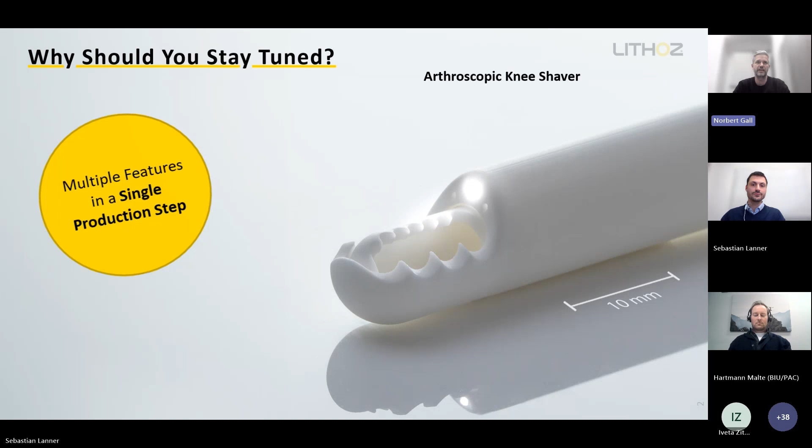So first of all, as a teaser, I wanted to highlight again why you should stay tuned during the next 60 minutes. It's exactly because of parts like the one you see here on the right-hand side. This one is an arthroscopic knee shaver. You maybe perfectly recognize it, but this knee shaver has been printed in one single production step, and still it has, of course, multiple features, as you can see here.

First of all, we can find two channels for rinsing in this part, another bigger channel for putting a light source through, and a channel for the drainage. And above all, of course, it's a knee shaver, so it also features rotating cutting blades, as you can see in the middle part. And I wanted to mention that again.

Why is that so important, and why is this so innovative, what we are discussing here today? Because it's about ceramics, and ceramics are the world's toughest materials in existence. Ceramics, as you might know, are PFAS-free, and they are perfectly biocompatible. We can print these kinds of technical ceramics for the medical industry in ultra-precise geometries, and as you will see later on, Bosch Advanced Ceramics is doing so in serial production of bigger or smaller lots.

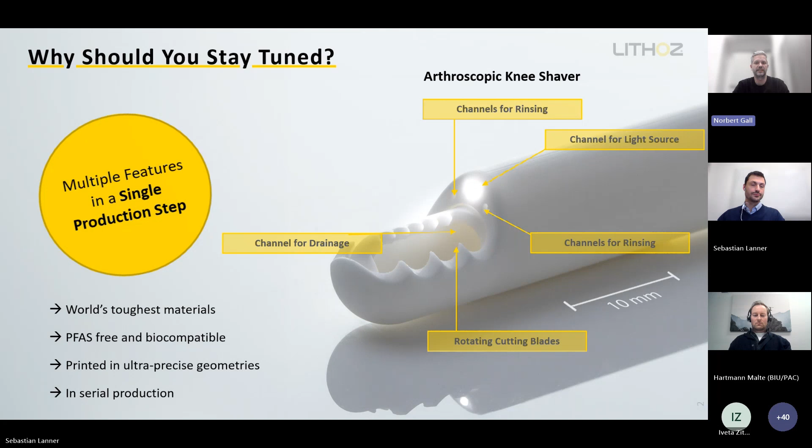So this is really something that is and will be highly relevant for the entire MedTech industry. Before we go into detail with our experts, I just wanted to guide you shortly through this webinar's roadmap. In the first part, Sebastian will take over. Lithoz will then explain the challenges of the MedTech industry as they are today. You're probably perfectly aware of those challenges, but we will also point out where we see the potential to innovate.

We will get a quick introduction into LCM ceramic 3D printing by Lithoz. After that, Sebastian will go into detail about which ceramic materials are actually printable with LCM technology, and he will give you a first short glance into multi-feature MedTech parts. Then he will hand over to Malte, and Bosch Advanced Ceramics will go more into detail about why customers opt for ceramics.

So they perfectly, of course, know why someone chooses ceramics over metals or polymers. And a very important part will also be their MedTech applications, which they have already been producing in serial production at Bosch Advanced Ceramics. And before I forget, of course, you might have heard there are some corporate news as well, and Malte will, of course, go also into detail here.

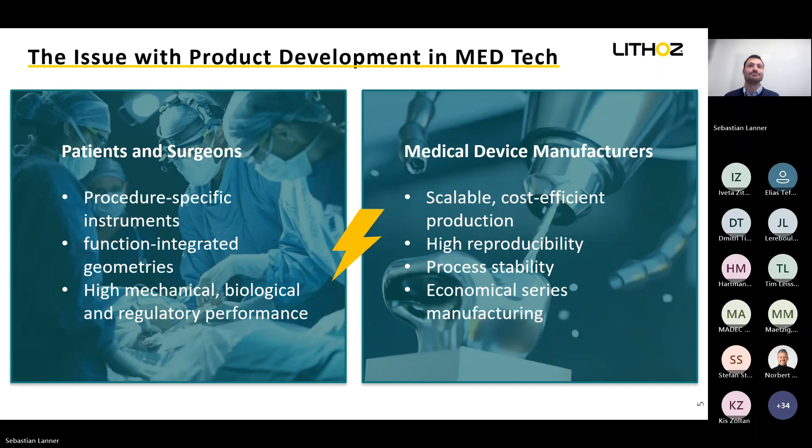We strongly believe these views can be reconciled with less effort than is currently required, generating a win-win-win situation for all three parties: patients, surgeons, and medical device manufacturers. So what gives us the motivation to believe this?

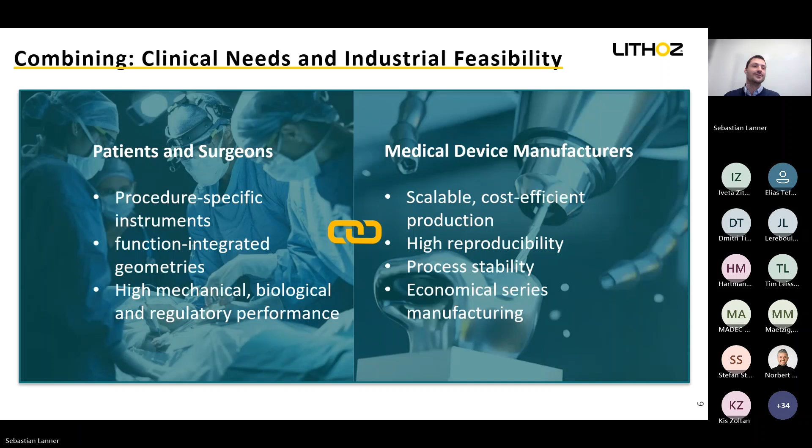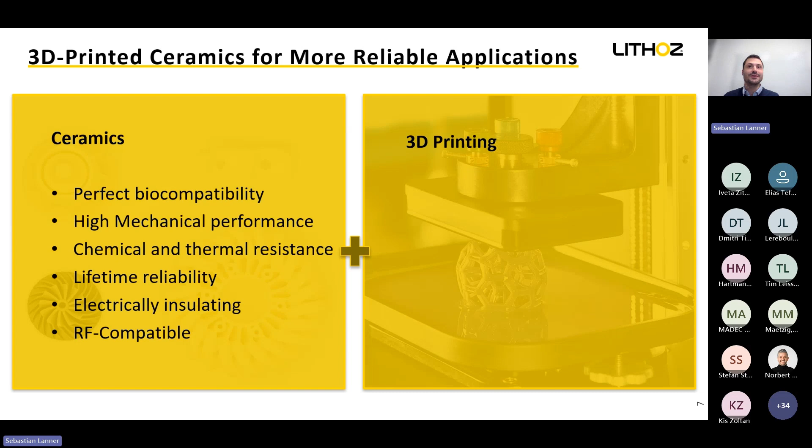Lithoz has developed a technology that allows us to combine, on one hand, ceramics. We talk about high performance ceramics, used in MedTech already for decades due to its outstanding properties, like excellent biocompatibility enabling long-term implantation without adverse tissue reactions, and high mechanical performance with outstanding hardness and wear resistance, which is critical for load-bearing implants, for example.

We have chemical and thermal resistance, allowing sterilization and stable performance in aggressive biological environments. Because ceramics are electrically insulating and RF compatible, they are ideal for implantable electronic devices, such as neurostimulation devices or hermetic housings. On the other hand, we combine this exceptional material with the most innovative manufacturing technology: 3D printing.

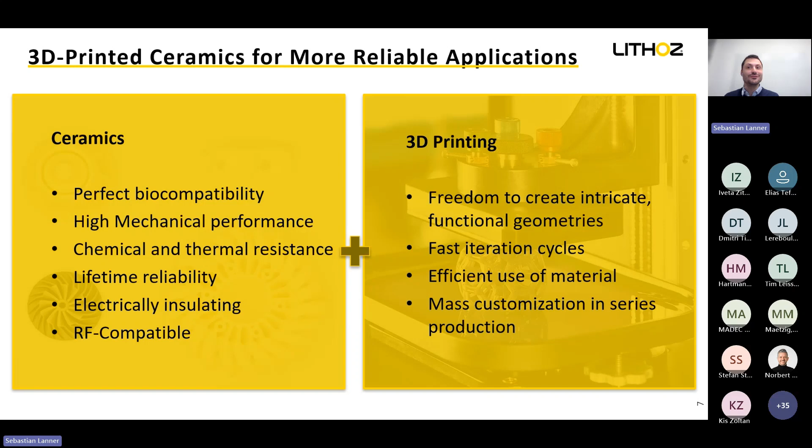This allows us to create new geometries. We have very fast iteration cycles, because new ideas need a lot of iteration to become a product, and this is very easy with 3D printing. We have the possibility to very efficiently use our material, which brings a new topic of mass customization in serial production. So why do we see an advantage here over already proven technologies?

Let me put this here. With traditional technologies, when we create business cases together with new leads, new projects, and new parts, we see that a lot of cost goes into molds and tools for drilling and manufacturing. We have long development cycles, as it takes quite some time to iterate with these technologies, and as soon as you increase complexity, it drives the costs immensely.

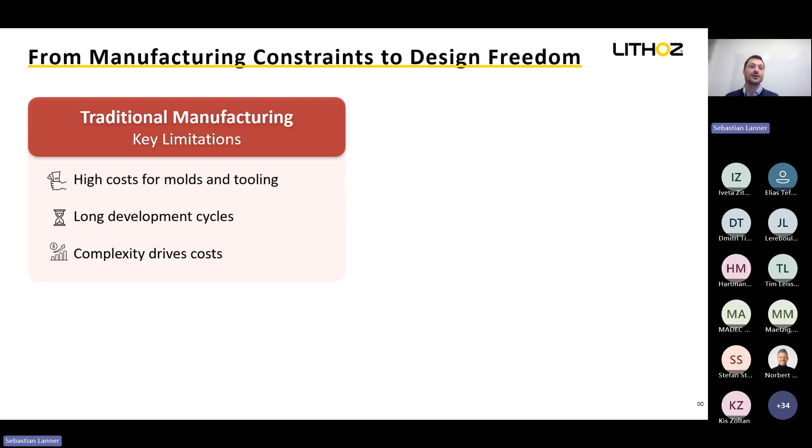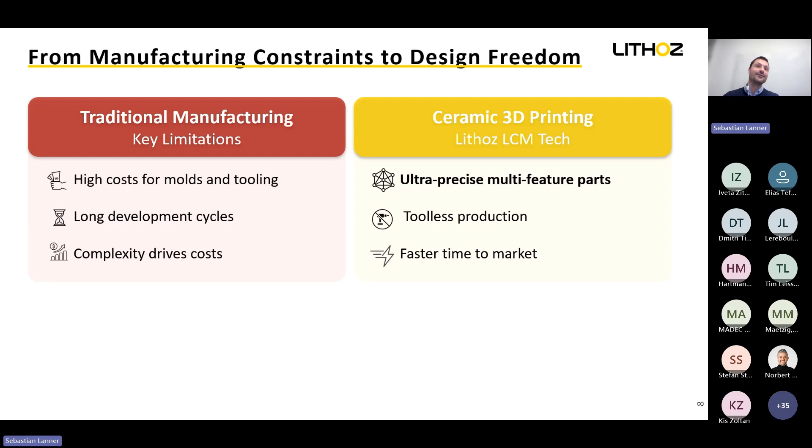On the other hand, we have ceramic 3D printing with Lithoz's LCM technology. This allows us to create ultra-precise multi-feature parts and gives you a broad spectrum in design. We work with toolless production, so there's no need for any tool in the manufacturing steps. We cure our parts with light, which you'll learn more about in a later slide, and here we have a faster time to market. So elevate your application from a standard metal part to a multi-feature ceramic part.

Now let's explore how this technology actually works. LCM, which you might have heard often by now, stands for lithography-based ceramic manufacturing. I want to show you a simplified process chain with a workflow to produce a ceramic medical device. We start with a CAD file, which we prepare in our own slicing software. Lithoz has its own software developer, creating software for every need in this workflow. After a quick machine setup, the part is ready to print.

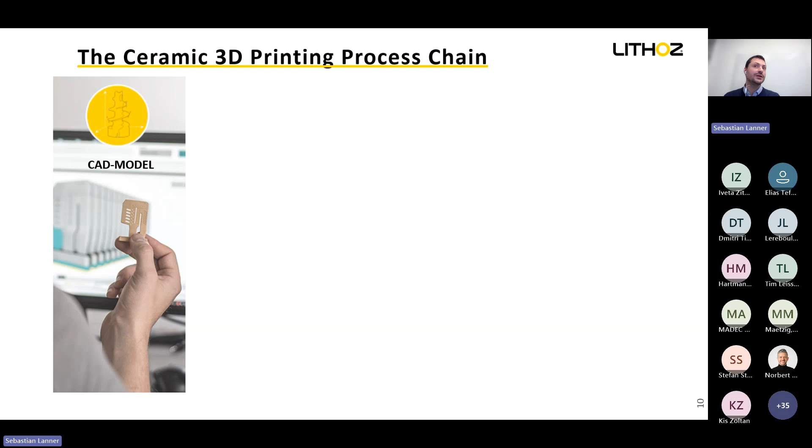The 3D printing process is very straightforward, and our system is built to run 24/7. So after the printing process and a small cleaning step, we will go into the debinding and sintering step.

This is a very crucial step and has two parts. In this debinding and sintering, we create the outstanding final properties of the ceramic. I have more details on a later slide about what is happening here to create the ceramics. And in the end, we get the final product.

For sure, this is simplified. There will be additional steps for a real product. There could be removal of support. You definitely have quality control. You have sterilization, and you have packaging for the finalization of your part.

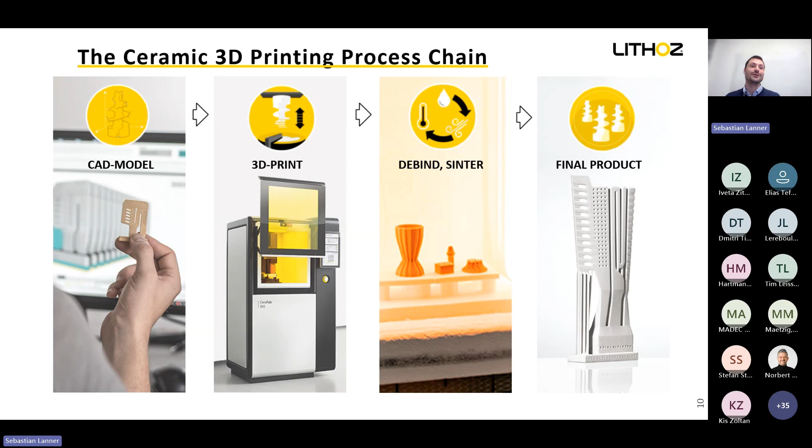So let's go deeper into the actual printing process and how the system is built, shown in this animation. I would like to start this video clip and explain what you see here. What we see here is the Cerafab S65 Medical, and we start the video and go directly into the building area.

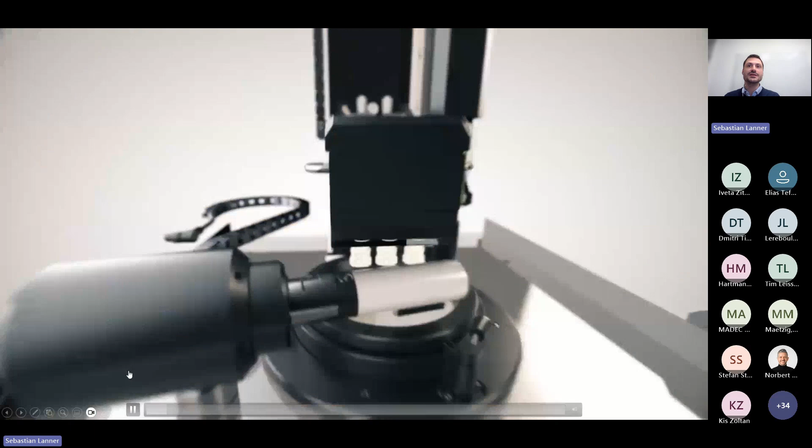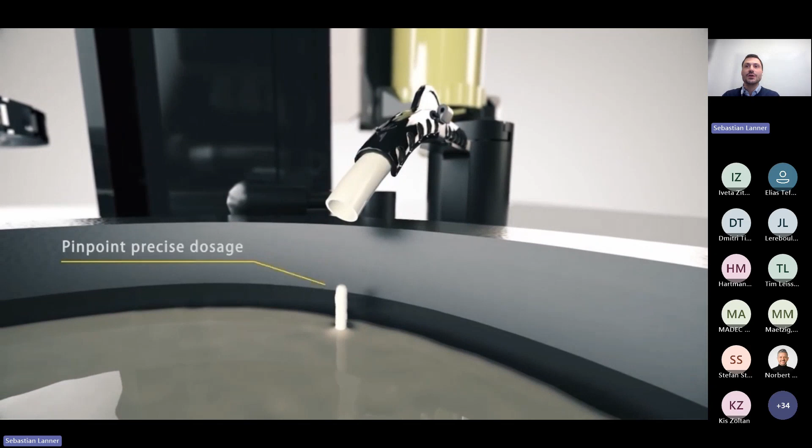The system has a top-down approach, so the build platform faces down and you see the parts also facing down to the vat where the material is inside. We have an AI-driven dosing system that allows us to use just as much material as necessary in the print.

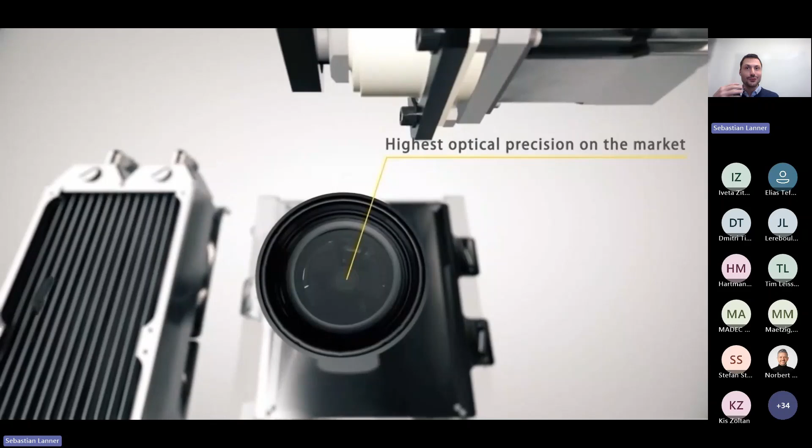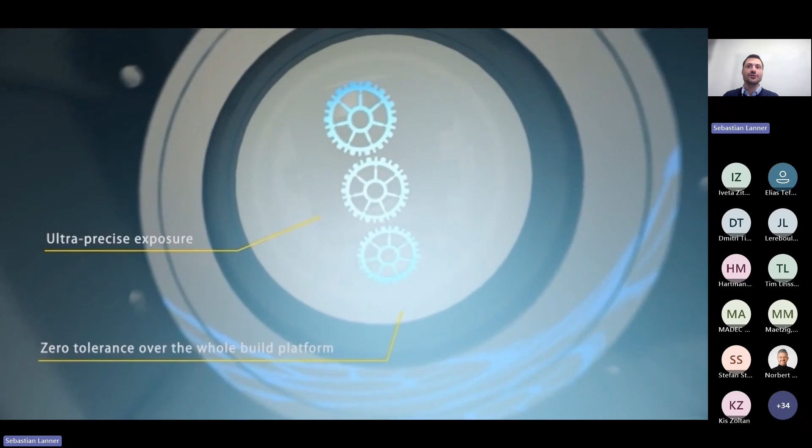We have the rotation of the vat with the use of a vibroblade to create a uniform thin layer of slurry. We go through the slurry and come to the heart of the machine, the optical system. It is based on a DLP, and by using blue light sent through the most accurate optical system in the industry, we create the layer image, which is projected on the bottom of the vat.

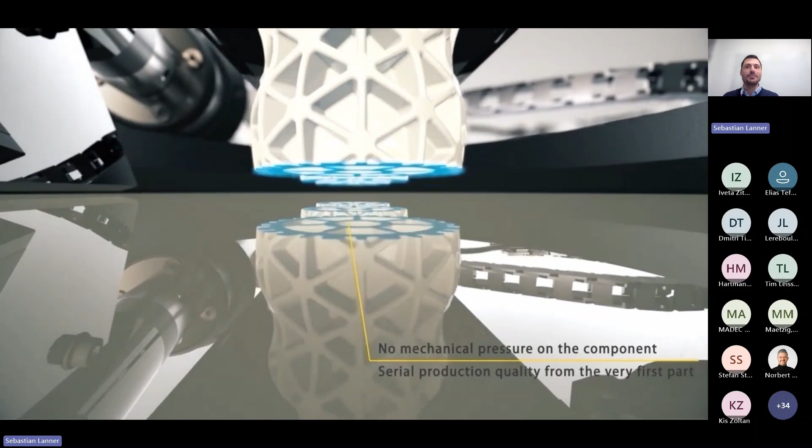This cures the slurry on the projected areas and makes it solid. By repeating these steps, layer by layer, we create the actual 3D printed part. And we're here again where we started, and we move on to the next slide.

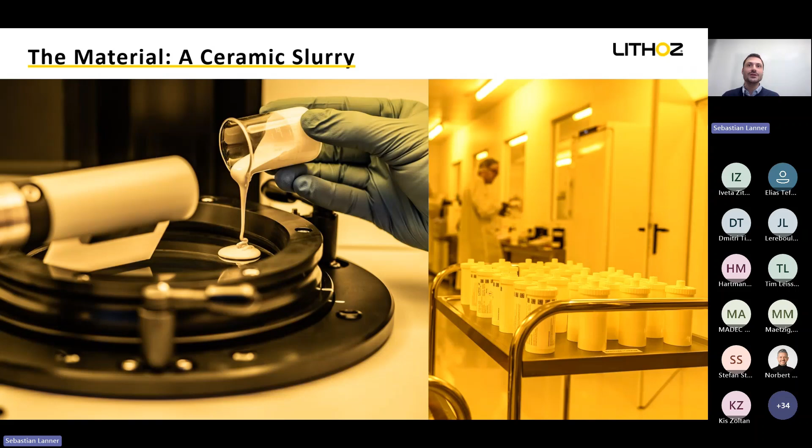In this slide, I want to give you a short introduction to the printing material, because the material we print with and the material of the final part are quite different. Our printing material is a mixture of ceramic powder in a nanoscale and a photocurable binder.

You can compare it very similar to a resin from various SLA printing technologies. Combined, this creates a highly viscous slurry. This viscosity you can compare with honey or a Greek yogurt. Our machine has several technical features to deal with this viscosity.

This is one of the reasons why we do not provide the material for non-machine customers, as the risk for failure would be significant. So this is about the slurry.

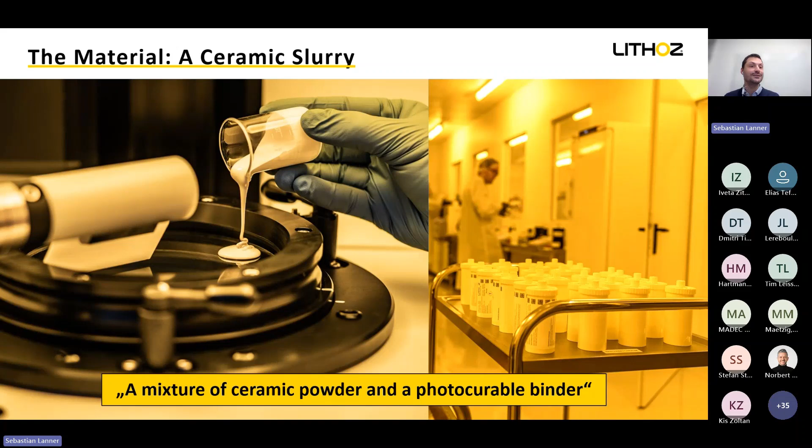So we have our 3D printed part, we have a cleaning step, and then we go to the important step of the thermal post-processing: debinding and sintering. You see here three figures of our CEO, Dr. Johannes Homa. Some of you may already know him. In this first figure on the left side, we see him basically directly after the printing and cleaning.

Here we see, also in the small round image, the gray polymer structure holding the yellow ceramic particles in place. And from here, the thermal post-processing journey begins.

In the beginning, we start with a step called debinding. With up to 450 degrees centigrade in this step, the polymer is burned out, and the temperature burns out all the residual carbon in the part. The part after this stage is very porous and therefore very fragile.

Here we need a sintering step; this is the second step. In this step, we go up to, depending on the material, up to 1700 degrees centigrade, and densify the ceramics, creating the outstanding properties you might already know from ceramics. You also see on the right-hand side how such a sintering furnace could look. And this was about the manufacturing process.

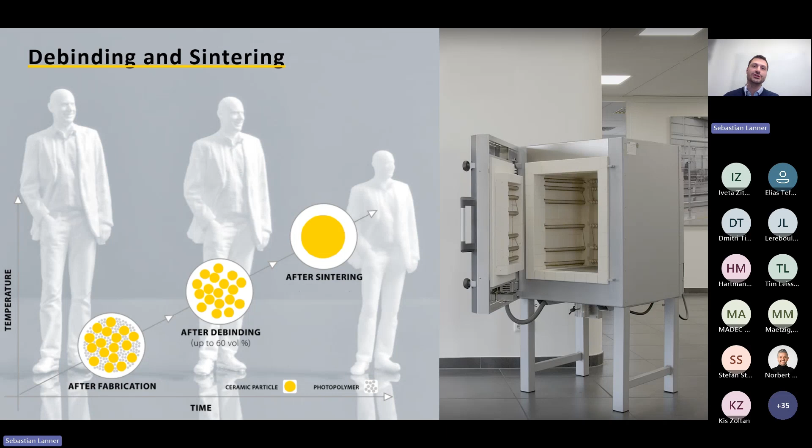In the next two slides, I want to show you two features of our technology. First, I'll answer the question: why is LCM ideal for medical device manufacturing? For this question, I want to compare two different printing principles on the market.

So we have on the left-hand side the top-down printing principle, and on the right-hand side the bottom-up printing principle. I will guide you through this picture. What is the main difference here?

We have the projecting system. Very easy to see: the top-down has the projecting system on top, the bottom-up has the projecting system on the bottom. The next one, also very easy, is the build platform. To create the part, the build platform moves down in the top-down principle.

On the right-hand side, on the bottom-up, the build platform moves up like we do in the LCM technology. Now I want to highlight a very important difference here: material consumption. As you see, with the top-down approach, you have a very high volume of unused material, which you need to recirculate to stay economically productive. But this recirculation has drawbacks in regulatory aspects, where you need to prove that it maintains all slurry properties, which can be challenging. With LCM, we use just the necessary amount of material in the print area, so this is nothing you need to worry about.

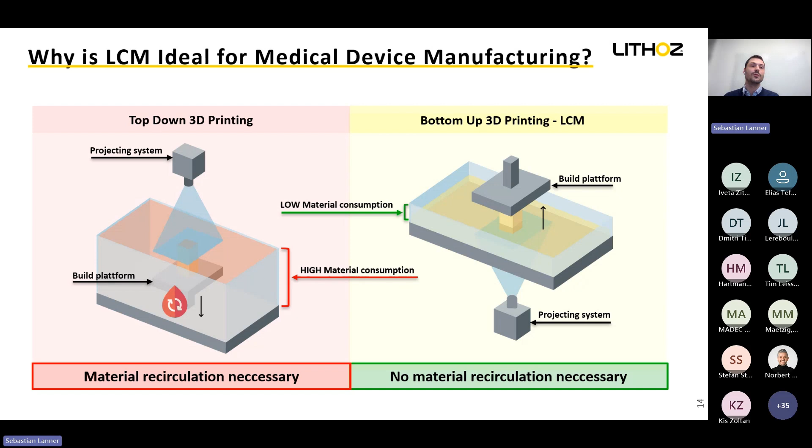So this is more or less on the hardware side. I also want to show you an additional software feature called digital surface enhancement, or DSE. If you already know a lot about 3D printing, you could argue that our technology, since we use a DLP system with a pixel grid, can struggle to create flat surfaces on rounded geometry.

As you see in the picture, this was an issue. But with this new feature, we're able to smoothen the outermost surface, basically softening the pixel grid on a software basis, giving us the ability to create a perfect surface finish. This also helps a lot to create sharper edges for cutting tools.

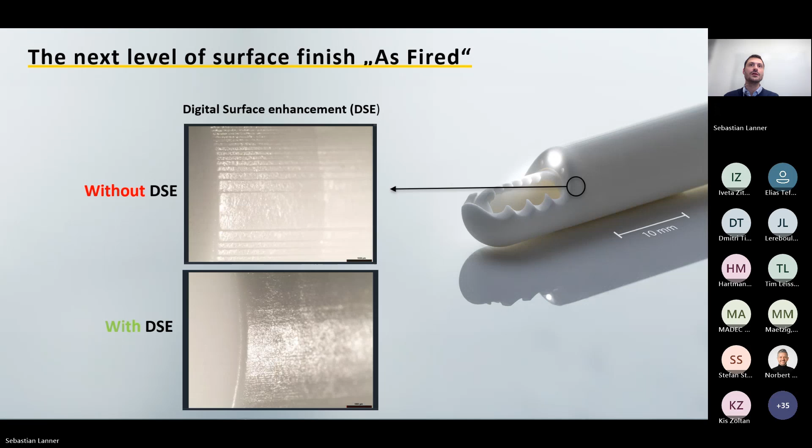So let's have a look at high performance ceramics. There's one area at Lithoz I want to outline, which is for sure one of our key competencies and one of the reasons why we are so successful: material development.

You see on this beautiful picture many different applications to explore. Lithoz is not only in the MedTech area, we are also in different industrial areas like semicon, aerospace, or automotive. But today we put a spotlight on medical materials, and I will guide you quickly through our medical grade materials.

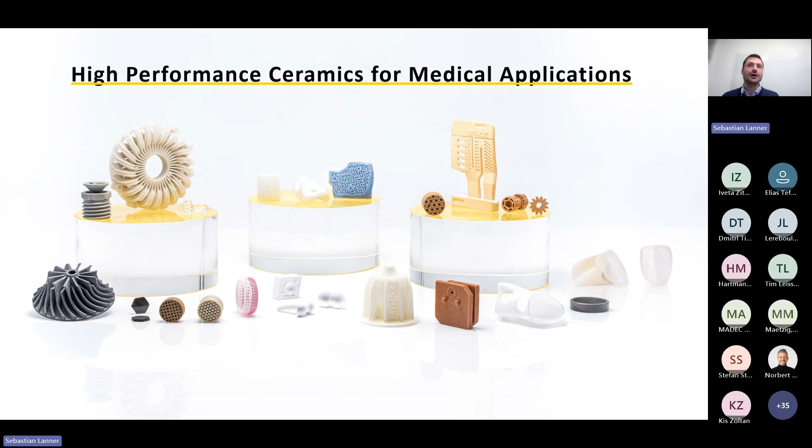The first material I want to briefly explain is silicon nitride, which originally comes from aerospace due to its thermoshock resistance, but is getting more and more interesting in the medical field due to its strength and antibacterial properties on the surface, resulting from the specific surface it generates after the sintering process.

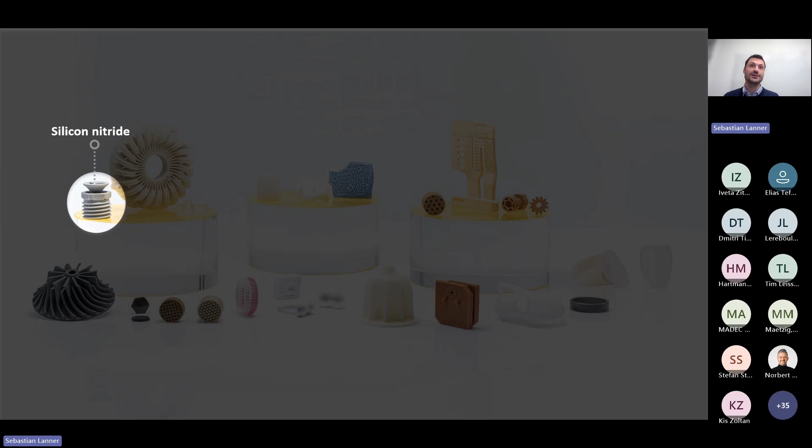As well as a small input to our bone replacement material from HA, hydroxyapatite, and TCP, tricalcium phosphate. These are the best solutions for critical size bone defects or any other application where resorption is a necessary factor.

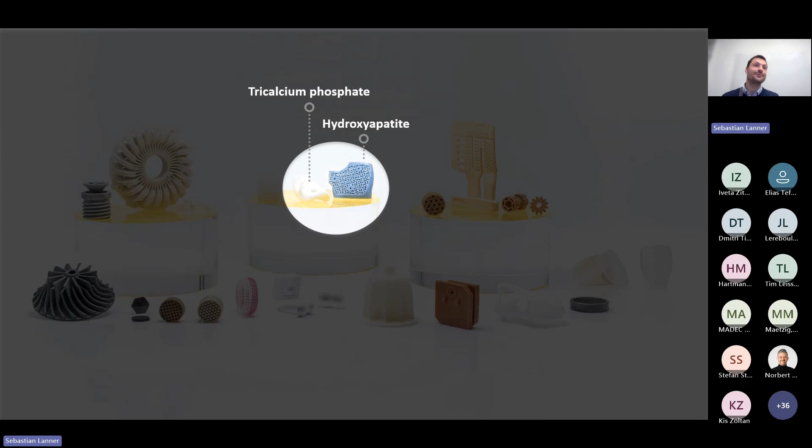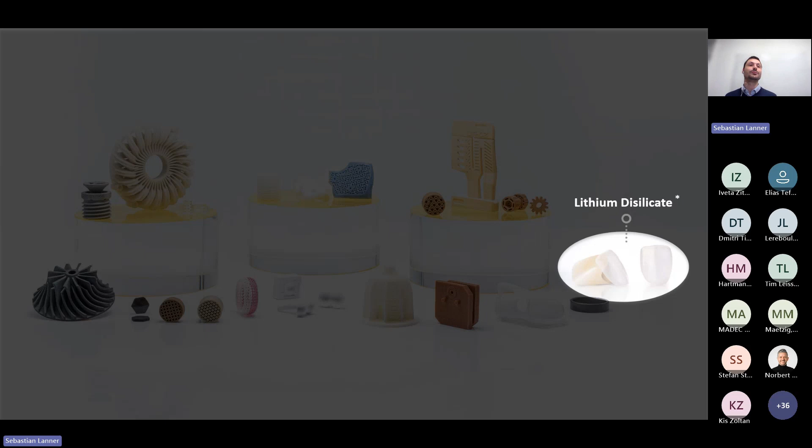The next material I want to show you is one which is very well known in the dental industry, called lithium disilicate. It's well known as the most aesthetic material for dental restoration, and we're currently developing this material for 3D printing to open a new area in restorative dentistry.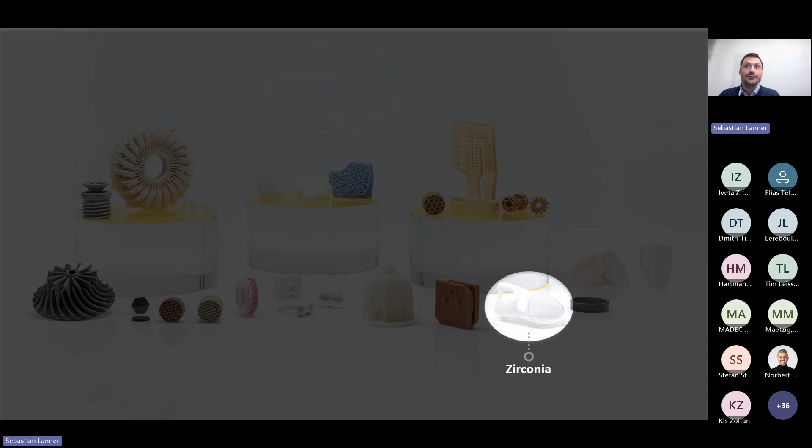Another material we can print on our system is zirconia. It's a highly durable and fracture-resistant material, perfect for applications like dental implants, where we currently see a huge shift in demand and a shift from metal to ceramics.

For the next two materials, aluminum oxide and aluminum toughened zirconia, I will show specific applications at the end of my presentation. But before that, I want to show you something different, which is also a very crucial step.

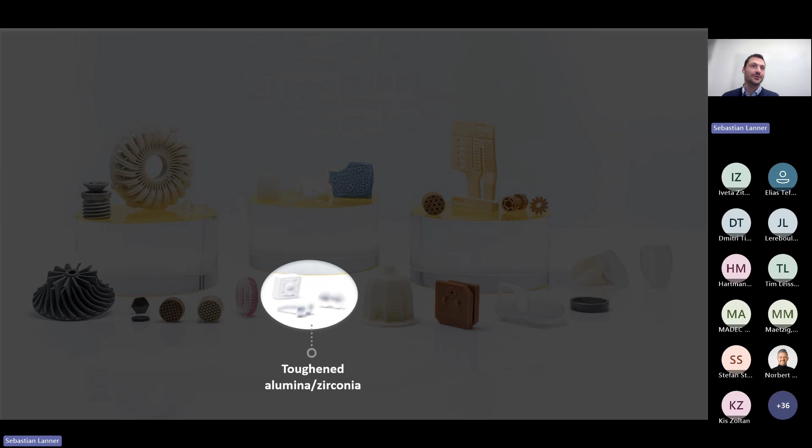Having a lot of material is one thing, but another important thing for medical is ensuring quality. Lithoz has set a new standard in slurry production, and since this year we are ISO 13485 certified. The scope here is the manufacturing of slurries for medical devices.

All of our slurry products are produced in a Class 8 clean room environment. Each batch undergoes quality control, so we have 100% quality control, and the material is delivered with a certificate of conformity. Our quality management system allows full traceability of each material, giving our customers confidence that the material is not only high performance, but also compliant with medical quality requirements.

So let's have a look at the last part of my presentation.

Three medical applications at a glance. The first one is basically cutting tools. As mentioned, LCM has opened new possibilities with cutting edges, so we can create all types of existing cutting shapes and even rethink the shape of cutting tools, made from ATZ. It's alumina toughened zirconia, a mixture of 20% aluminum oxide and 80% zirconia oxide, offering superior strength and toughness for applications in dentistry, CMF surgery, or orthopedics.

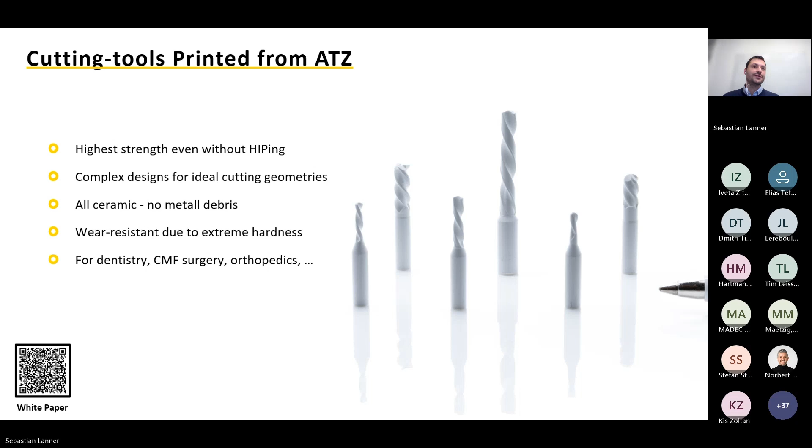Let's move on to the second application, which is also very interesting. This is an international project funded by the European Union: a pediatric blood pump from a project called OptiFlow. The goal was to develop a heart pump matching the physiological needs of pediatric heart failure patients. Lithoz took a major role in this development, improving the surface for blood flow by giving the circulated area a nanostructure to minimize clot formation. We also created a very new way to print this type of application.

The last application is already on the market, developed by our partner Katten in Germany and the Otoplastisches Zentrum. They developed a new type of mold for hearing aids, also called otoplastics. Normally these parts are made from polymer, but they are very hard to clean and have a short lifetime, and the aesthetical appearance needed improvement since it's a very visible part. Ceramics and metals are used as alternatives, but metals distort the acoustic behavior, so ceramic was the final solution. We were able to create a very smooth surface, as this is a wearable device. This is a very interesting application.

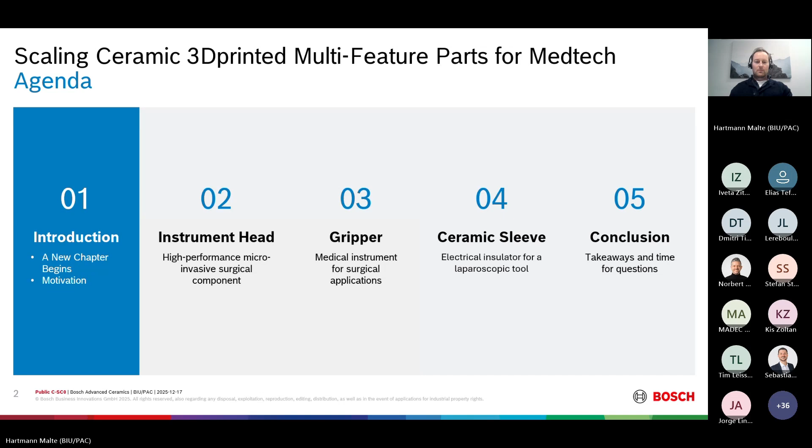A new chapter begins, but before we look to the future, let's take a brief look back at where we come from. We were founded in 2016, based on an idea from three Bosch employees, and the name at the time was Cerix. Since 2020, we've been known as Bosch Advanced Ceramics. In 2023, the decision was made to specialize exclusively in additive manufacturing of ceramics and discontinue traditional processes.

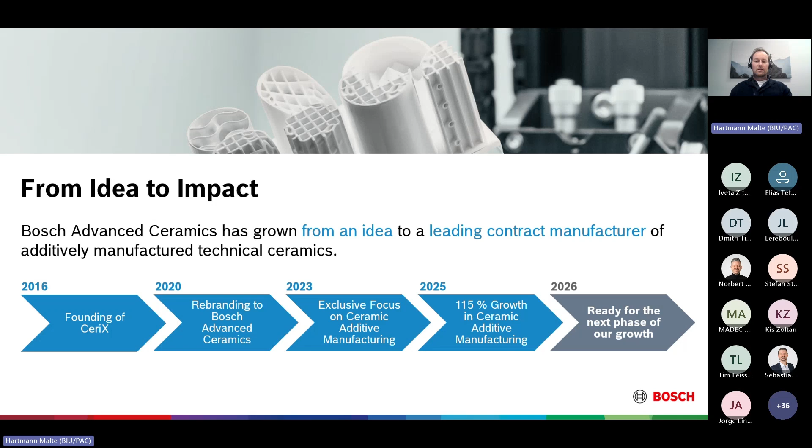This year and last year, we recorded exceptional growth rates. Compared to 2024 alone, our turnover has increased by 115%, laying the foundation for the next phase of our growth. That is, Bosch Advanced Ceramics will transform into Sinto Advanced Ceramics. That means Advanced Ceramics joins the Sintokogio Group, with the new official name being Sinto Advanced Ceramics Europe GmbH. It will be the same people, same expertise, but stronger backing. Officially, that transition is scheduled for January 1st, 2026.

Some of you might have seen that name together with 3D Ceram, but let me share a bit more about that company in the background. Sintokogio is a publicly listed, globally active industrial group based in Nagoya, Japan. That company operates in various high-tech fields, including high-performance ceramics and additive manufacturing. They share our vision for expanding the possibilities of ceramic 3D printing. By joining the Sinto Group, we gain long-term stability, international visibility, and access to new resources that will strengthen our development.

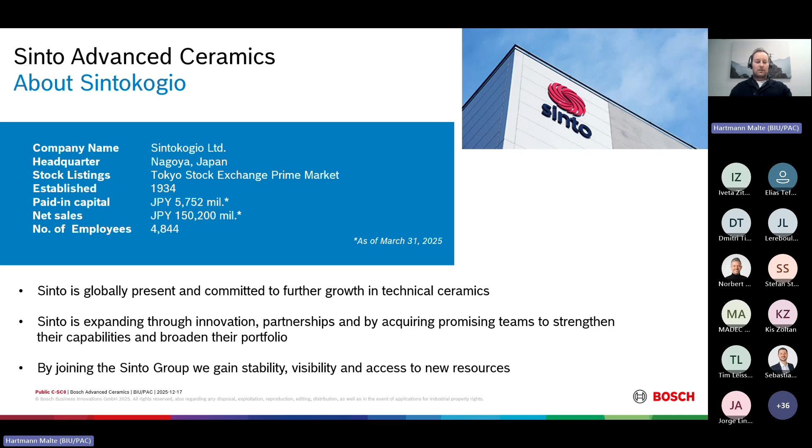What does that mean actually for customers and partners? So many things stay the same, especially in daily business. You'll keep working with the same people, processes, and the quality that you trust. Our team members will transfer to the new owner. Our technologies, materials, and quality standards obviously remain the same.

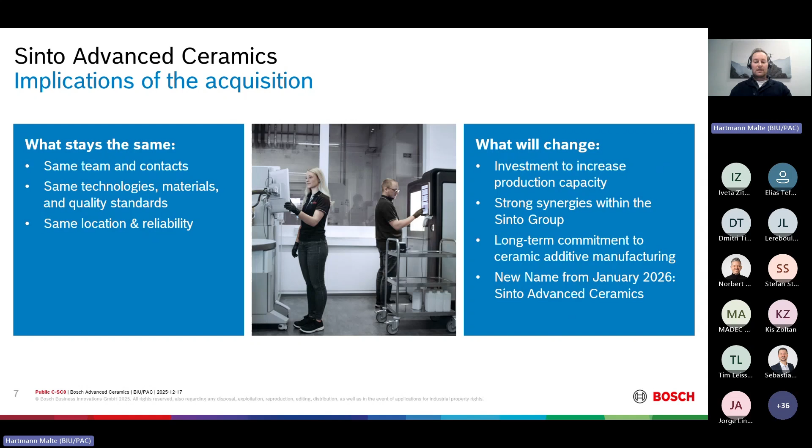And actually, we will stay at our current location until preparations for our new production facility are completed, which will then also be in the Allgäu region, which is in the south of Bavaria in Germany. Until further notice, the commercial agreements will stay the same. At the same time, this step brings clear advantages: more resources, greater capacity, and the backing of a global leader. In short, we can say what you value about us stays, and you gain a stronger and more future-ready partner.

So actually, this marks an exciting new chapter for all of us, and we remain fully committed to innovation, quality, and collaboration. So thank you for your continued trust and partnership, and we look forward to shaping the future together.

But now let's dive a bit more into the topic why we're all here today. And let's begin with the motivation. Why does MedTech actually require ceramics? So one of the reasons for it is the PFAS dilemma. PFAS stands for per- and polyfluoroalkyl substances. And those substances are used to create, among others, polymers. And those PFAS polymers are already widely used in MedTech due to their biocompatibility and chemical inertness.

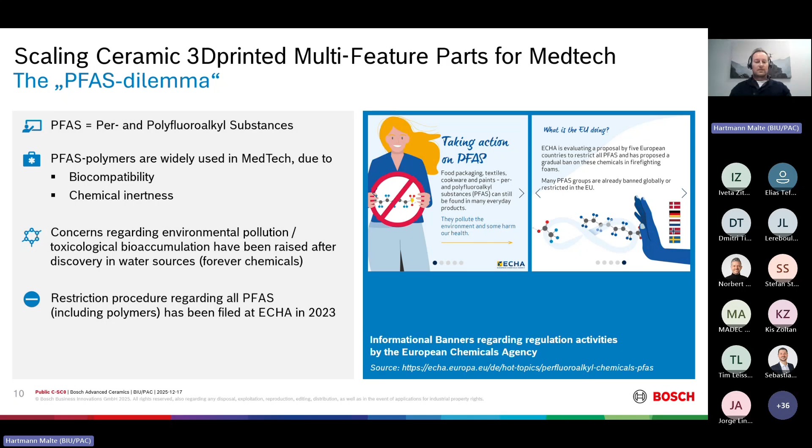A solution for that could be ceramics. We get more and more requests from customers who are seeking to replace PFAS parts with ceramic materials, because just like PFAS polymers, ceramics are bioinert and sterilizable. At the same time, ceramics are superior with regards to wear resistance. If you've ever been in a hospital, you see there's a lot of trash generated actually, and there's a trend to reduce that amount. It's called the no disposables trend.

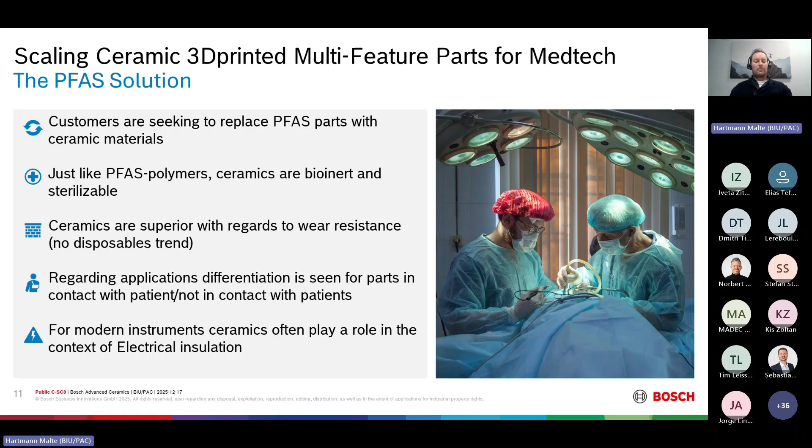In general, we're differentiating between applications that are in direct contact with patients and, on the other hand, those that are not in contact with patients. Also, requests show that for modern instruments, ceramics often play a role in the context of electrical insulation. So therefore, there's a need for ceramics. But then the question is, why does MedTech require additive manufacturing?

And one very good reason for that is the increasing significance of minimally invasive surgery. What we see here in figure 1 is the rise in proportion that is now taken up by laparoscopic procedures. What does that mean? Here we see data from the US over a time span of 15 years, from 2003 to 2018, for 6 types of procedures. There's cholecystectomy, the removal of the gallbladder.

Inguinal hernia, the correction of a hernia in the groin. Appendectomy, which is the removal of the appendix. Colectomy, the removal of all or part of the colon. The Nissen fundoplication, the surgery to treat gastroesophageal reflux disease. And gastrectomy, which is the removal of a part or all of the stomach.

If we sum up these 6 procedures, then on average, 270 cases were observed in 2003, and this rose to 368 cases in 2018. So overall, over that time span, an increase of 36% of cases could be observed. But at the same time, the total laparoscopic cases increased from 133 to 280, representing a 111% increase. So laparoscopic procedures increased significantly more than the total.

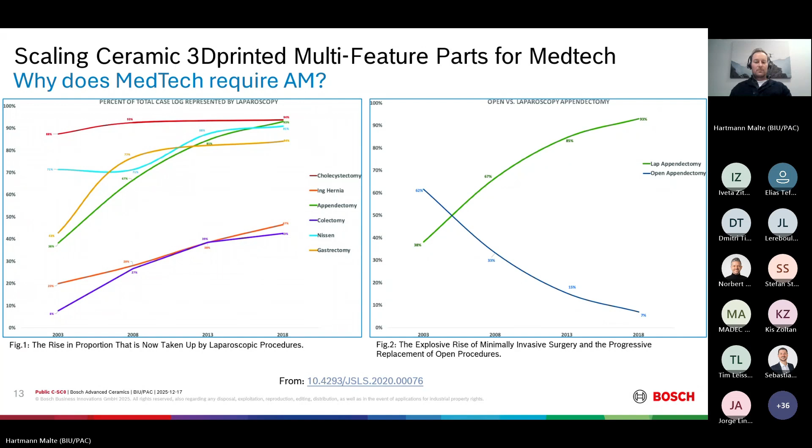Open appendectomies fell from 62% in 2003 to 7% in 2018, and in parallel, laparoscopic procedures increased from 38 to 93%. So given these facts, I think we can say one reason is the increasing significance of minimally invasive surgery, and therefore, on the technical side, instruments are required to be ever smaller and more delicate.

And actually, additive manufacturing is perfectly suitable for these extremely delicate and highly complex parts. At the same time, the quantities for each surgical instrument in many cases are rather low, but then again, the variety is quite huge. So creating a tool for each variation is not economically feasible. Therefore, this tool-less additive manufacturing saves time and money. This is called the low volume, high variety scenario, and it's actually ideal for AM.

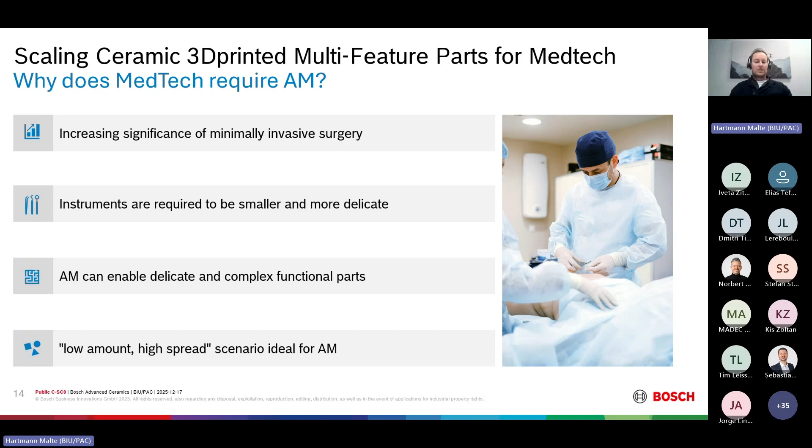Now let's dive into the applications. As I mentioned, the first one would be the terminal head. This is a high-performance microinvasive surgical component. And this is what it looks like here. You can see it. We're producing 60 parts manufactured in one print job. Actually, so far, we produced 18,000 parts in total. And in 2025 alone, we produced 9,000 parts.

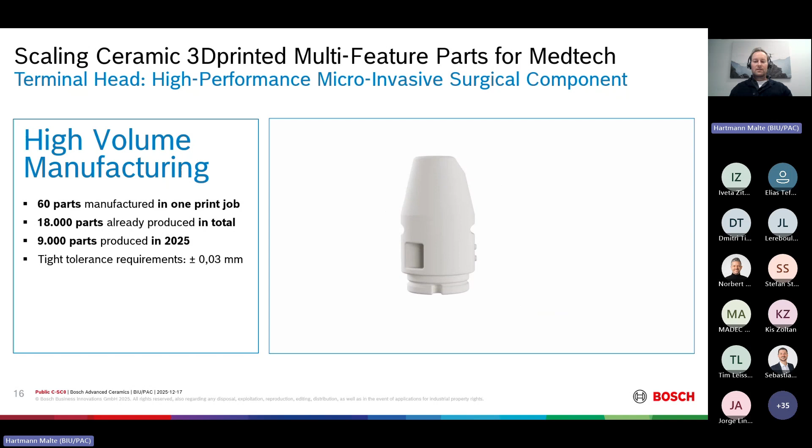There are quite strict tolerance requirements on these parts with only plus minus 30 micrometers. And it has to be pointed out that it's not only the printing itself which is relevant to that tolerance requirement, but also other influences. For example, in those data, 11 slurry batches, 3 powder batches, 5 furnace cycles, 2 different printers, and also the influence of different workers were influences that had to be considered.

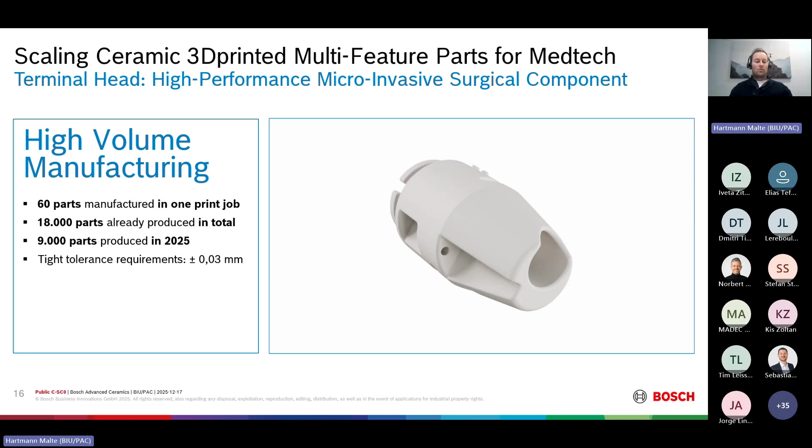If we look at another feature of this part, we see the target value was 9.05 millimeters and the tolerance requirement was the same. And the Z feature varies just a few microns within one print job. So there's more variation from one print job to another. Some are actually close to the tolerance limits.

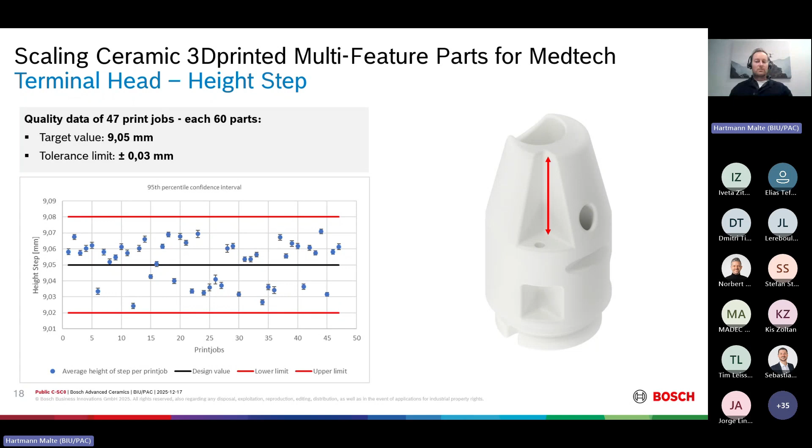The reasons here are obviously there's shrinkage during sintering. There were different vats that were used during the production. And there's variation from one printer to another. So here the confidence interval is 2 micrometers and the standard deviation is 7 micrometers.

Let's jump to the next one. This is the gripper, a medical instrument for surgical applications. The requirements here were that it was supposed to have an easy installation on surgical equipment, have an inner channel for fluid applications, and it's a part that is in contact with patients.

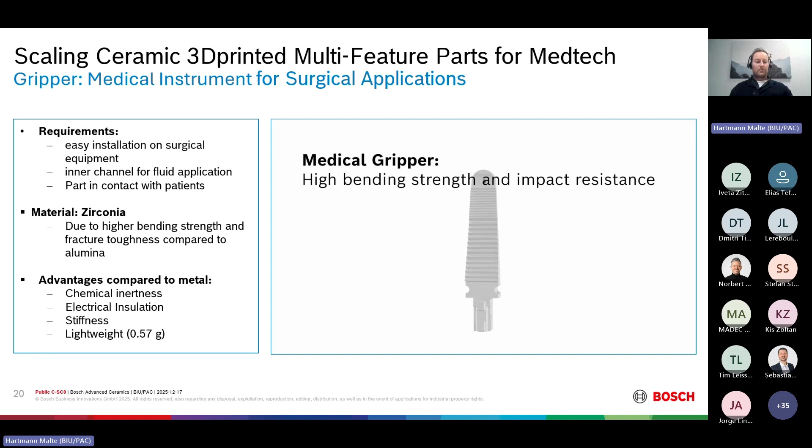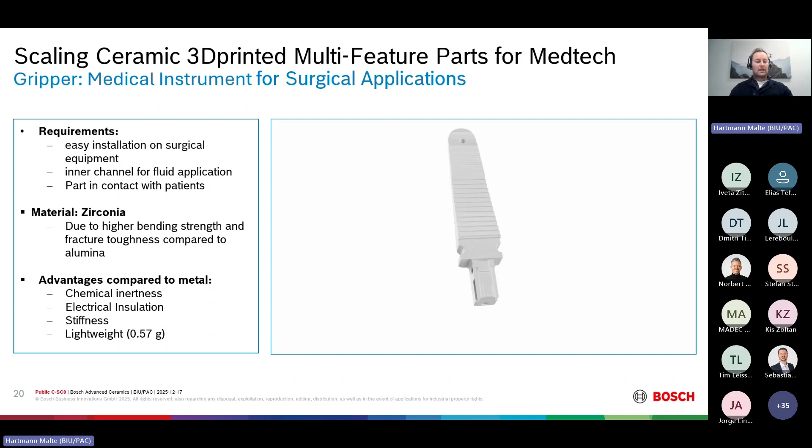Our suggestion for this part, the material it was supposed to be made of was zirconia, therefore it is also produced in that material type due to its higher bending strength and fracture toughness compared to alumina. Several advantages compared to metal exist, and those are chemical inertness, electrical insulation, the stiffness, and, not to be underestimated, actually the light weight of this part. So this only weighs 0.57 grams.

The last one I want to show is the ceramic sleeve. That's an electrical insulator for a laparoscopic tool. And here, this part is used to separate an electrical wire from the housing in a medical device. The goal was to use minimal space while also providing sufficient electrical insulation. So we were calculating that the wall thickness needed to be below 90 micrometers.

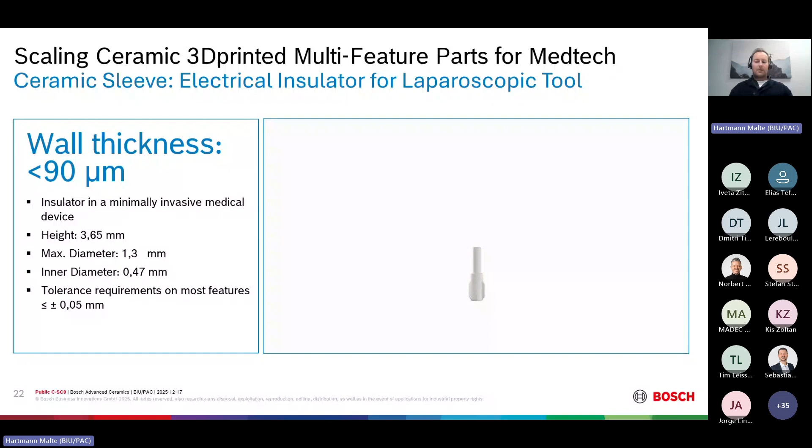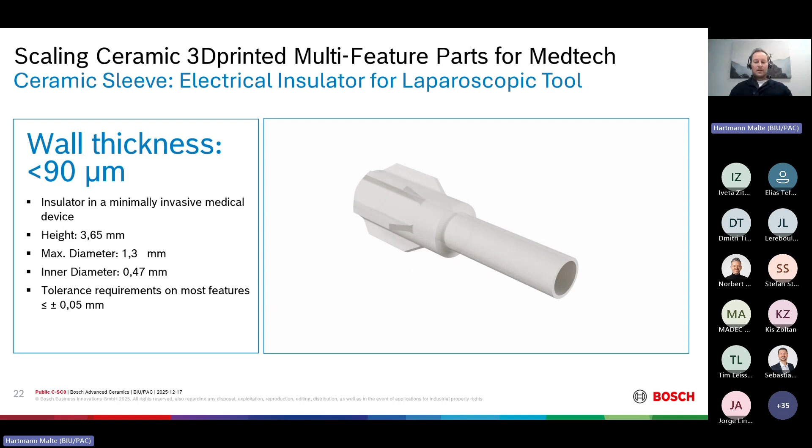In an iterative development process with our customer, we achieved electrical insulation with minimal wall thickness. And the benefits of AM were that we could use a quick development process and therefore also reduce the time to market. The tolerance requirements on most of these features are plus minus 50 micrometers. In the end, after successfully completing the development phase, the decision by our customer had to be made. Does he want to produce that in ceramic injection molding or additive manufacturing?

With regards to additive manufacturing, we can produce 1,400 parts in one run. The annual demand here is up to 50,000 parts. As I mentioned, AM is competing with ceramic injection molding. And it was clear that a high level of automation was necessary along the whole process chain to be cost competitive, because in the end, it's a cost competitiveness challenge.

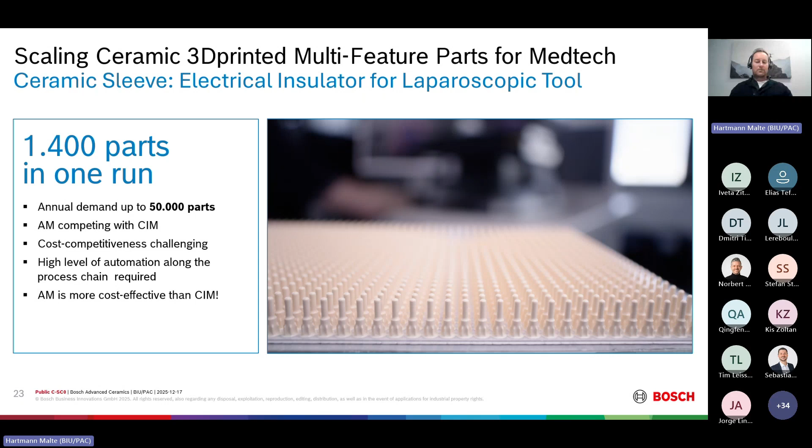The feasibility was proven with the final production method, and the precision here was key. This tight specification had to be fulfilled with a minimum scrap rate in order to be competitive. After evaluation, we could see additive manufacturing is actually cheaper than ceramic injection molding. And this is the data that was the result of this evaluation.

And this is relevant because we see that there was still some work to do to achieve full process capability, and therefore reduced measurement effort. In this case, this would mean that we could just random sample test those parts. However, the values are spreading to bigger size due to instability of the green part. And here additional effects are a closed cavity and of course, the necessary cleaning procedure.

Another feature here is the outer diameter. The target value here was 0.62 millimeters, and we see here all values are within specification, with 2 of the 1,400 values on the process capability limit. So we see more variation to bigger size due to slight overpolymerization on the outside diameter, but they are still within limits. So actually this feature could just be tested by random sample testing.

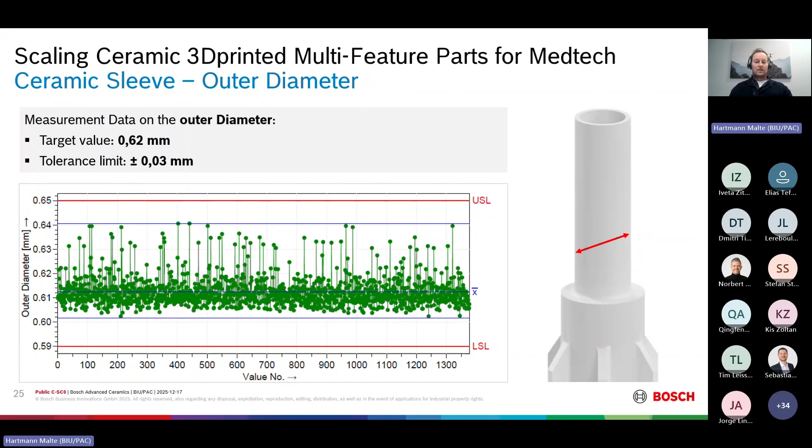If we look back, we see the inner diameter was 0.465 millimeters and the outer one was 0.611 millimeters. So in the end, we actually achieved a wall thickness of only 73 micrometers on the sintered parts. Now I would like to go to the conclusion. And for you, what are the main takeaways?

The first one is quality. Obviously, here we are creating fully dense parts. It has to be mentioned, however, that in additive manufacturing, we see an anisotropy, so the properties can vary in a certain range depending on layer orientation. The next one would be innovation. To be clear, not everything is feasible in additive manufacturing, but the design freedom is much larger than with traditional production technologies. Very good is the speed.

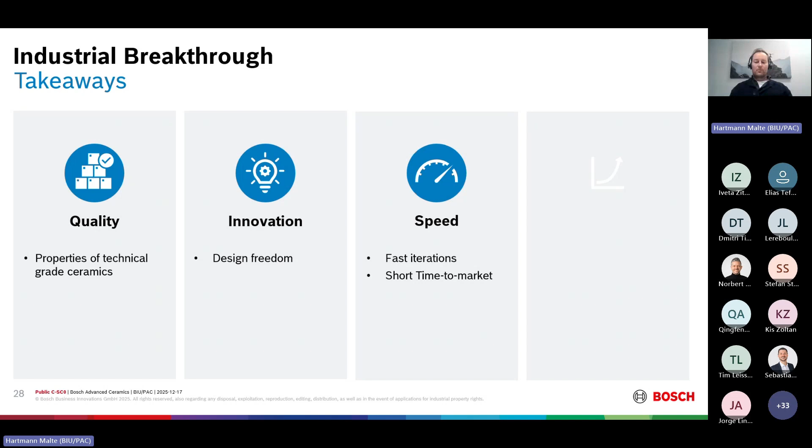Since we have no tooling, as mentioned, the variations that we see, for example, could be printed at the same time. Overall, therefore, we see fast iterations and a shorter time to market. And last but not least, the scalability. I think we have shown that we're really in the case of industrial production with regards to process stability, repeatability, and traceability. And of course, automation and process know-how allow for high volume production.